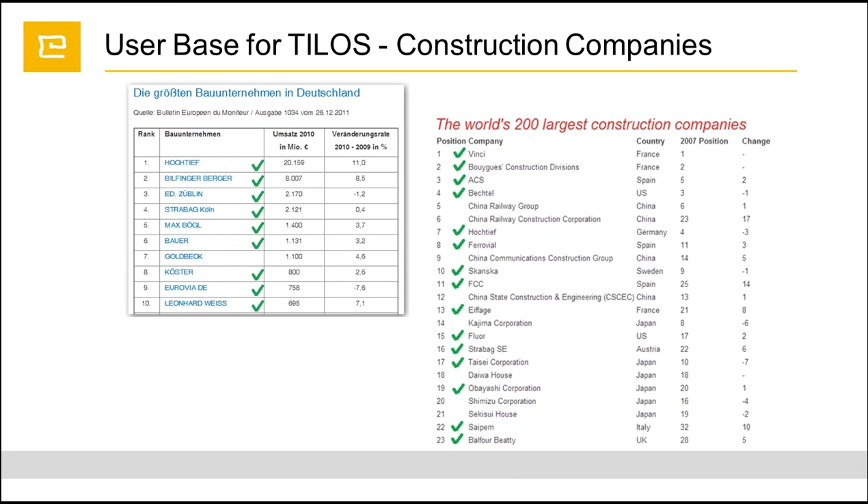TILOS also has big demand in the Middle East, in countries like Saudi Arabia, Qatar, United Arab Emirates, and Oman.

Okay, the linear project characteristics. As we know, linear project characteristics refer to projects like pipeline, railway, highway, tunneling, engineering, and transmission lines projects, and it has an axis which goes along with the work performed. We all know that linear projects have repetitive activities which go all along the length of the project.

Our goal is to optimize the productivity rate, reduce the project duration, visualize the project area, and minimize the overall cost.

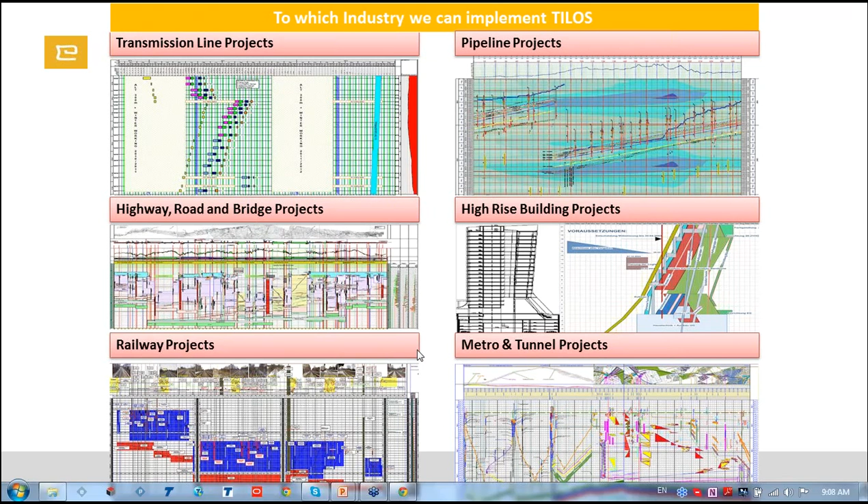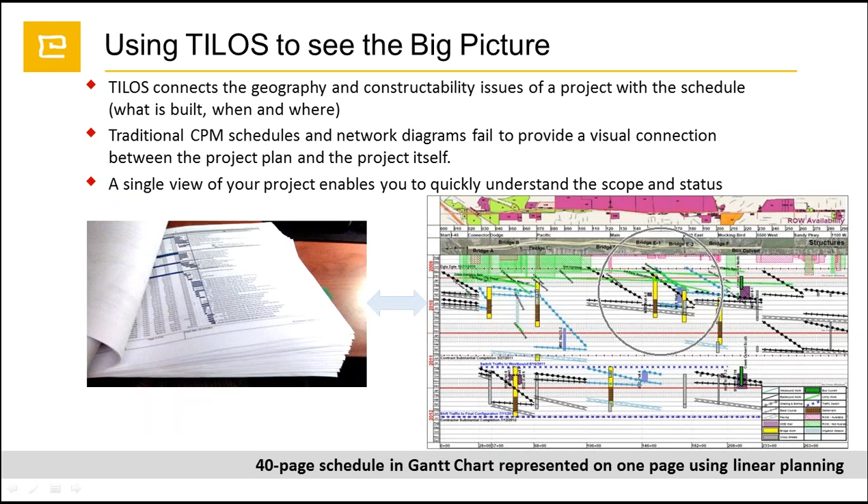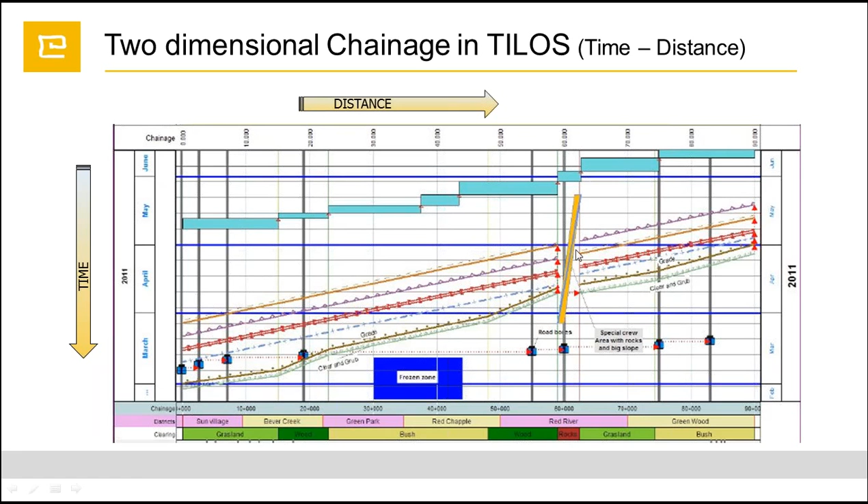So how does TILOS actually work? We have a main working area here. On the top, we have distance. This is a sample: let's say we have a 4-kilometer project that takes 3 months. All this is adjustable; you can put years, weeks, days, hours. Moreover, to support our work area, we can insert the graphical part of the project and also the elevation profile, where we have the road level, the cut area, and the fill area.

Let's say we have one activity starting from 2,600 meters and going right down to the beginning of the project, taking 3 weeks. Another crew starts from the other side of the bridge. You can see we have a bridge, and by the way, these are intersections - this is a road intersection, this is a rail intersection, and we have a culvert here. The second crew starts working on the topsoil activity from 2,600 or 2,800 until the end of the project, at 4,000.

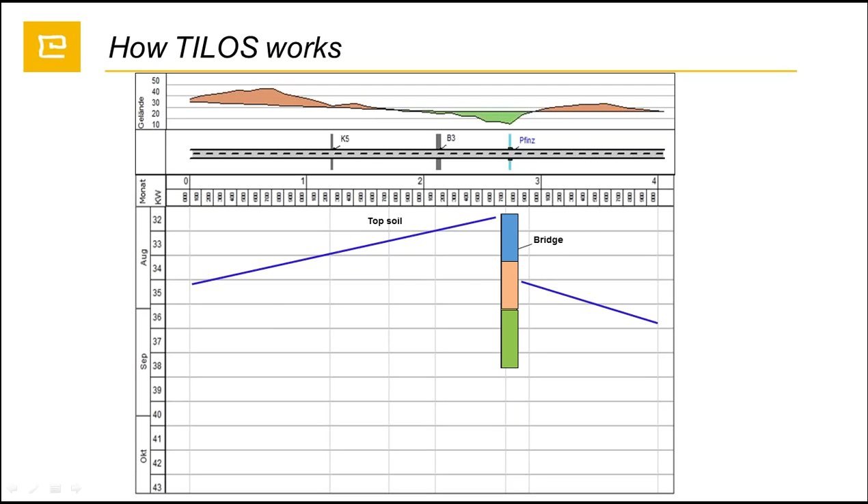TILOS can also manage not only linear activities but also structural works, such as a bridge, for instance. So the bridge can be set up as a summary task, and it can also be divided into parts, like foundation, abutment, and deck.

Also, we can see here that we have cut and fill activities. So the question is, why is this line, the cutting activity, different from the topsoil activity? Well, as you can probably recognize, this is one activity which has two breakdown points.

If we look up here, we can see that the quantity, the amount of soil, is much less, and it will take less time, around a few days, to cut this from 1,200 until 1,700. Our productivity rate is much higher as we have less amount of soil removal.

Another part is starting from the 1,200 until the 600 meters, and we can see that our quantity is much more, and we have to perform more work here, which takes longer than the previous part. The rest of the part will take around 1.5 weeks to complete.

Here we have, as a hammock task, inserted the filling activity. This is a triangle structure, and we can put it as a rectangle as well. This picture indicates that we cannot perform any other work until this filling activity is finished.

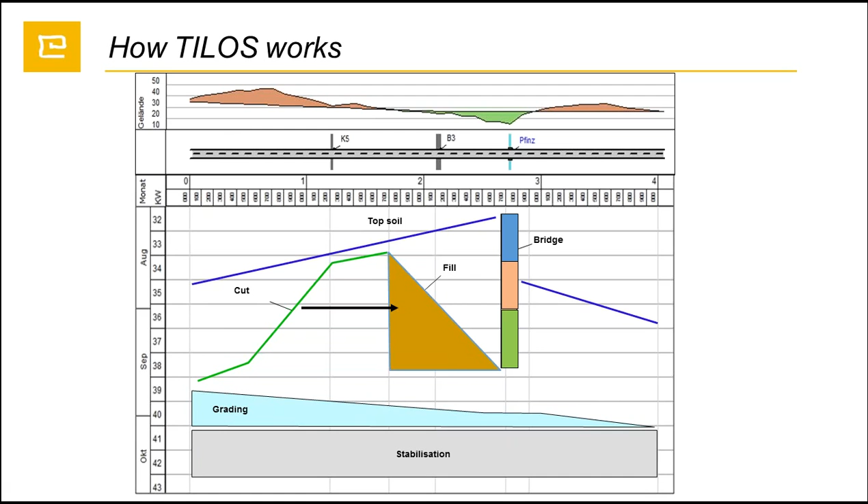Okay, TILOS has a strong clash detection advantage. This is a simple project, let's say, an illustration. In the middle, we have the area which, for instance during April at this kilometer place, has a restricted area. What I mean by restricted area is, for instance, there is an environmental restriction.

We cannot perform our work there until the time has passed. Or another part is that we have here the culvert. It might be given to another subcontractor, so we cannot perform our work here.

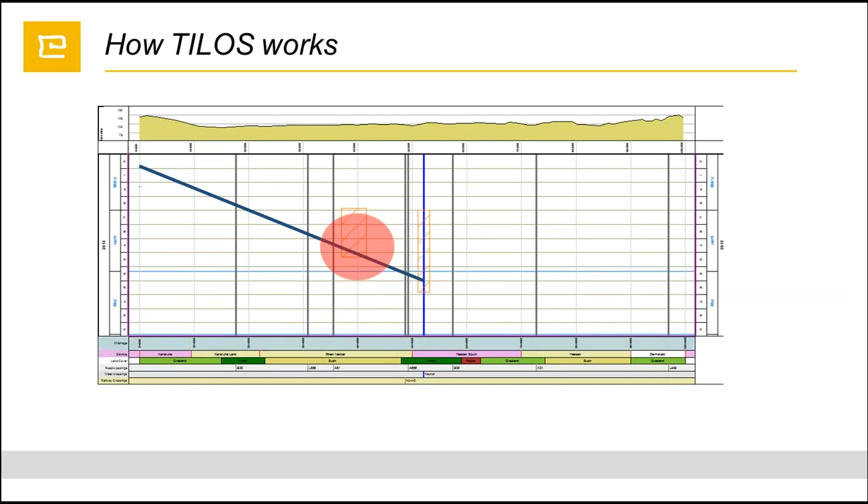So let's say we'll have an activity here, and we are able to see that our activity starts at the beginning of March, and is supposed to end here. However, we have here a clash. TILOS helps to analyze the clash detection, and to reduce it, there is also a possibility to avoid this clash just by moving the activity one week later.

So let's say the first activity, we postponed it for one week later, and another activity has a clash because it has a different work rate. So what we do in this case, we are able to move it as well and put distance lags between the activities.

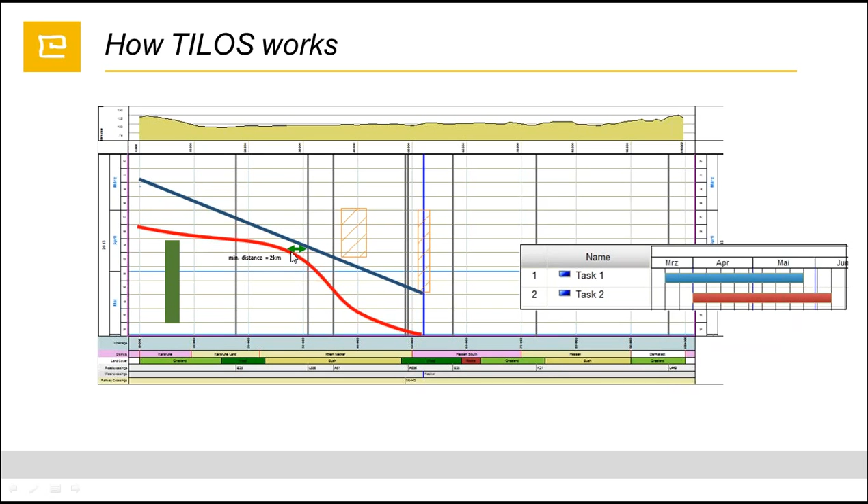For instance, we can put it on a daily basis, monthly basis, or length basis. We can say it's a 2 kilometers lag between each activity.

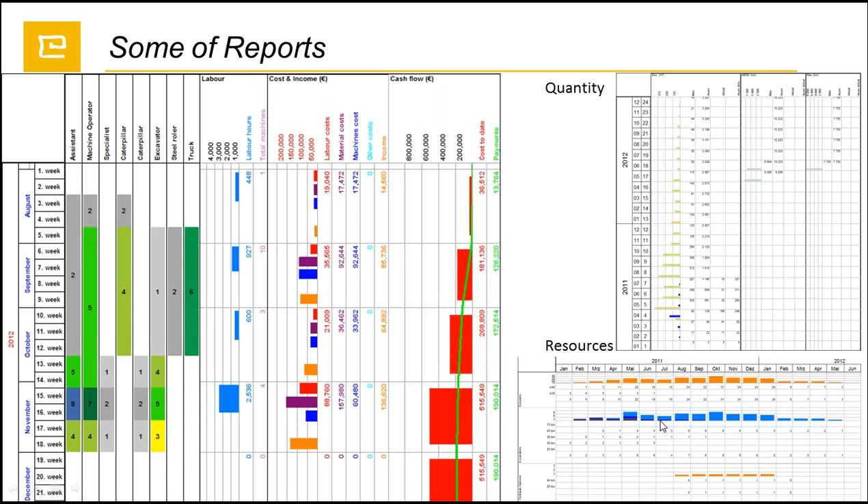TILOS has a big advantage with integrating with other systems. For instance, if you are a master user of Primavera, MS Project, or Asta Powerproject, you are able to transfer your data and project to TILOS from the clipboard or Excel, or from MS Project, P6, and Asta Powerproject using the XML format.

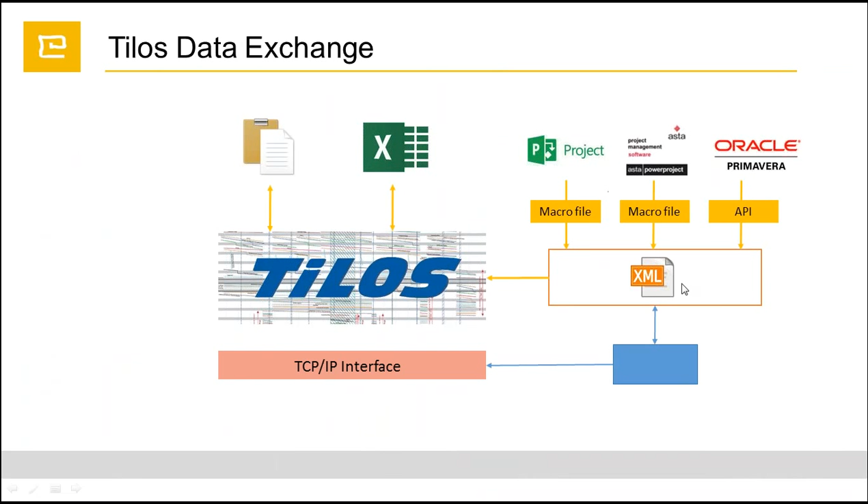So where do we actually use TILOS? We are able to use TILOS at any project stage, whether it is feasibility studies, overall plan, production plan, or special cases.

Also, it's used in pre-design, planning, procurement, execution, and claims, and it can be used by owners, engineering companies, subcontractors, contractors, or suppliers as well.

So summarizing my presentation, I'd like to say that we are able to use TILOS at any project stage level. Whether you have an ongoing project, we can implement it into TILOS, or if you have a tender stage, we are able to prepare your project as required, giving you multiple choices.

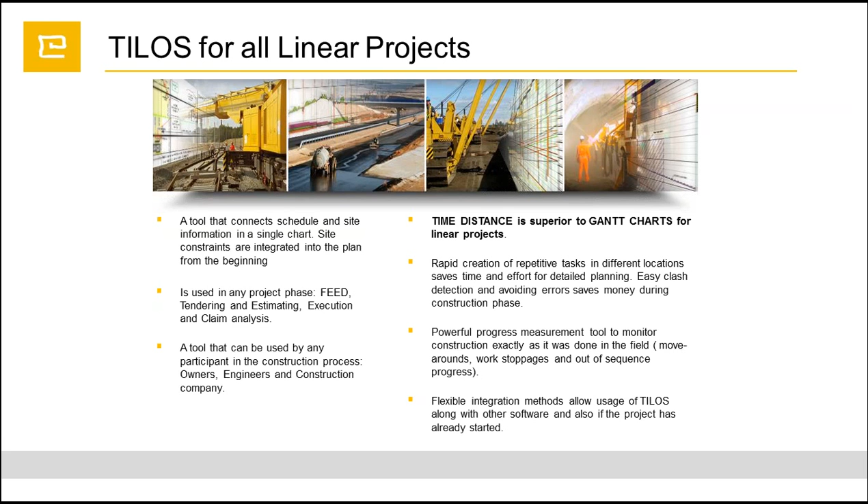Okay, now I'll go to the live demonstration of the project. Let me start TILOS first.

We create our project starting by clicking New. TILOS has a predefined template, but you can adjust the template or create your own that you will be using. If you are mostly doing road or highway construction projects, you can set up one TILOS template which will be used across different projects. In this case, we'll take the general template.

Setting up the project, we have the project name, the distance unit, whether it's meters or kilometer plus, then the start distance, end distance of the project, start date, and end date. Now we are able to set up the base and time unit, and set up the default calendar, or adjust any calendar as you would like. You can create your own calendar according to your country requirements, whether you have holidays or a winter period when you cannot perform work. You can set up your calendar and create your project accordingly.

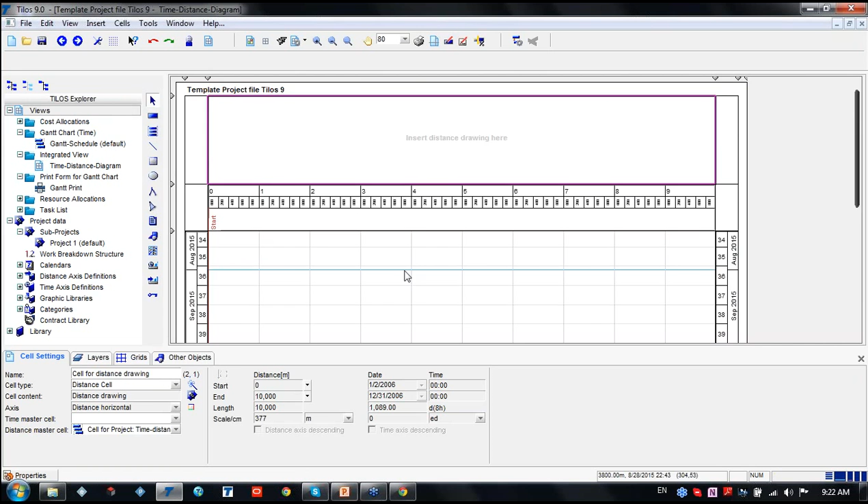As TILOS uses a cell system base, like in Excel, each cell has a different configuration setting, and our master cell is the main time-distance working area. By clicking here, we can see that all data entered into the main area affects the rest of the cells. So if you look at the lines, these are all connected.

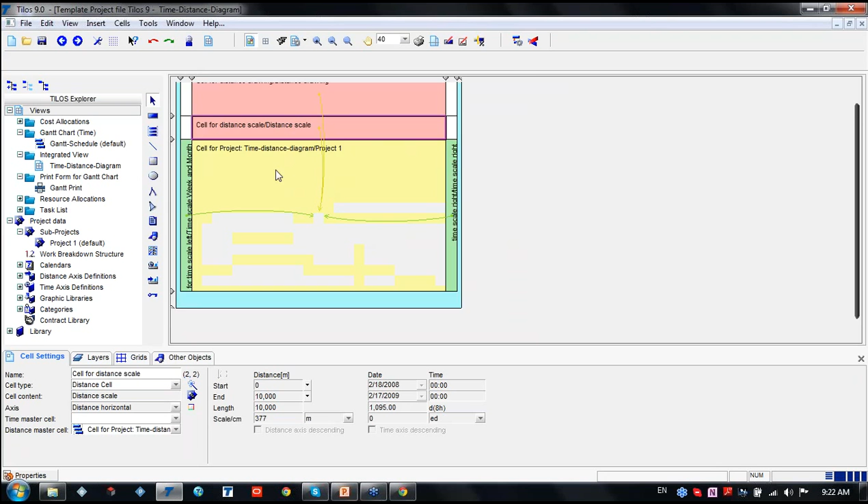Okay, so let's say we have a project starting from zero, and we have a project over 10 kilometers which will take around 5 months. Let's create this simple task.

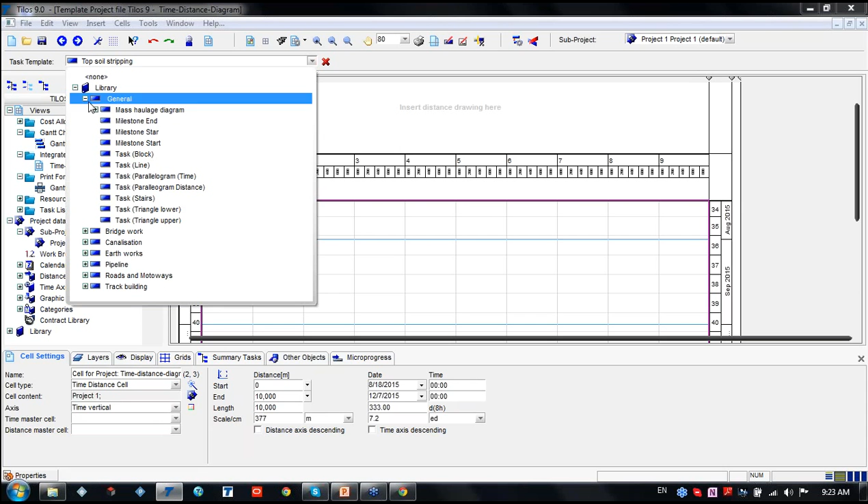For instance, we have a topsoil stripping task. This is the quick navigation where we have a library, and in the library we have task templates which are already predefined. As you can see, each task is predefined, and we are able to see it in our library section.

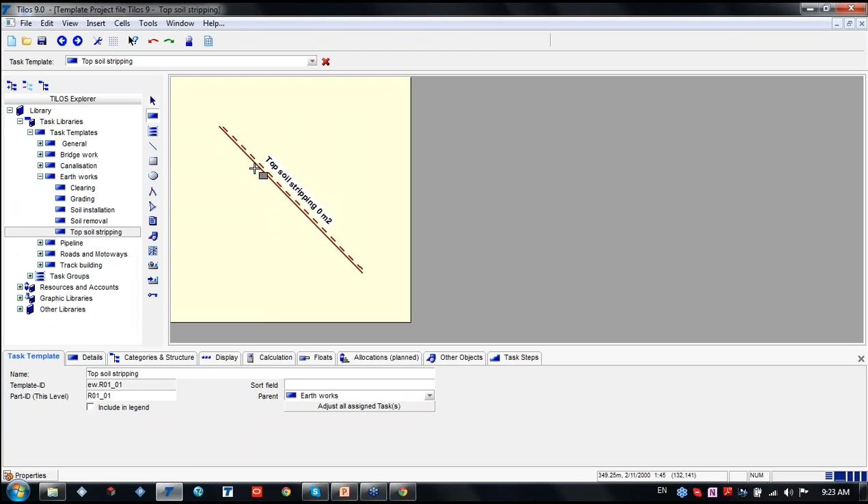Task libraries, task templates - let's go to earthworks and topsoil stripping. Each activity - well, one of our customers called it cosmetic works - and it's true, it is cosmetic work.

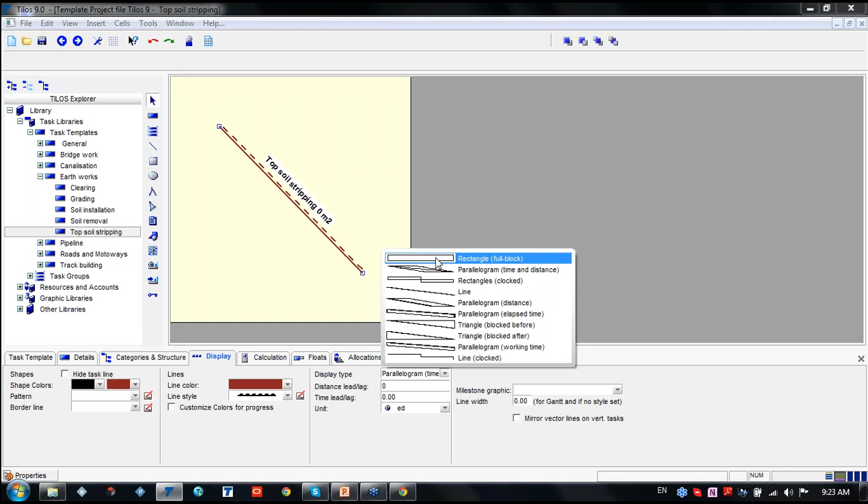We are able to set up the shape colors, then the pattern, as well as the display tab. It can be a rectangle or a parallelogram. Just a second, let me select, and you'll be able to see the rectangle and parallelogram options. Let's say we'll create - we're able to set it up.

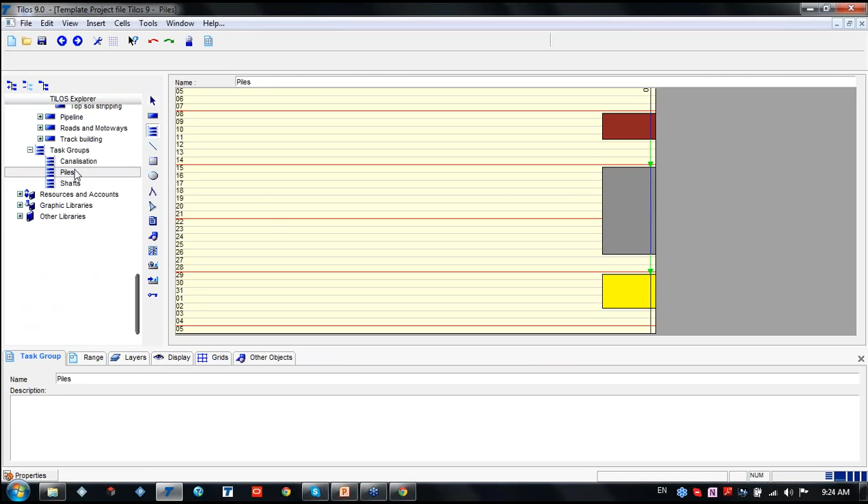Now this is just a task. If you go to the task template, here we have task groups, we have shafts, piles, canalisation - this is an already predefined task template which you can easily edit and add to.

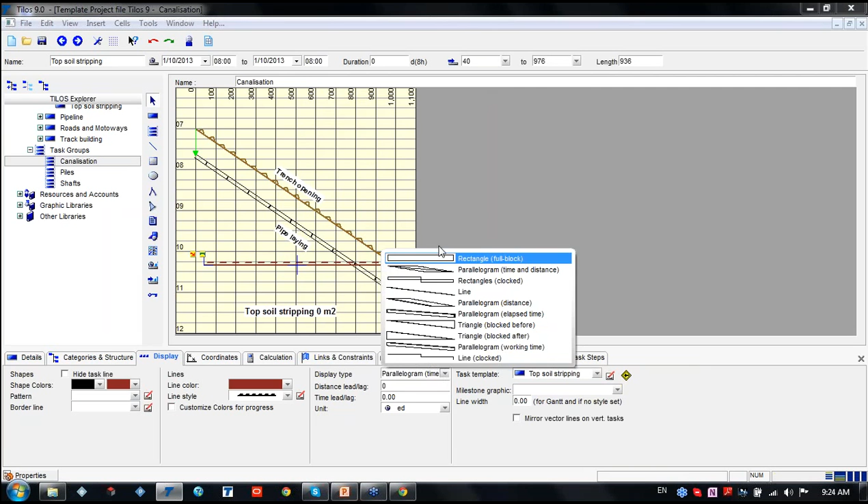Let's say I want to add another activity here, and it will not be topsoil stripping but trench opening. You can save it and you will have it. You will have the ability to easily enter this task.

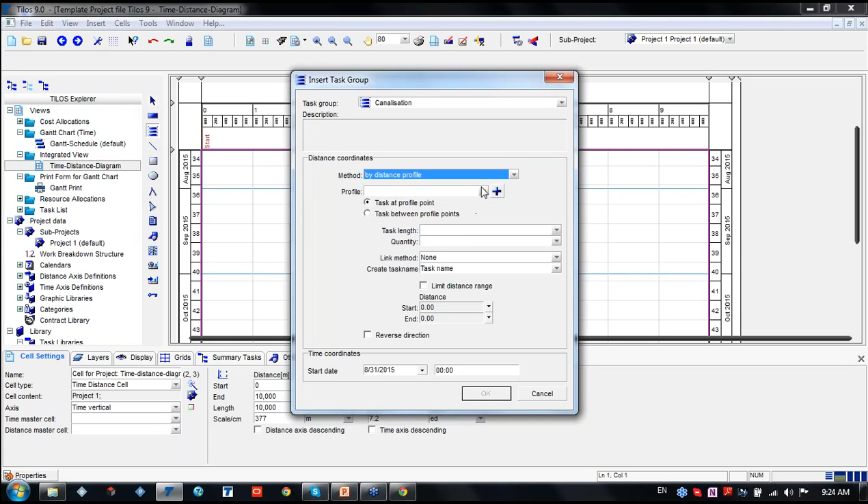By adding, let's say, the distance profile, important location...

Trench opening. Just a second, I will make it as a

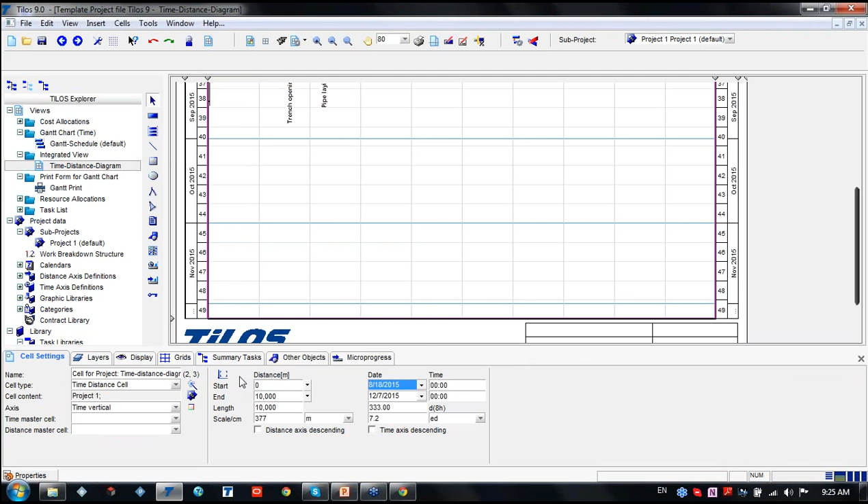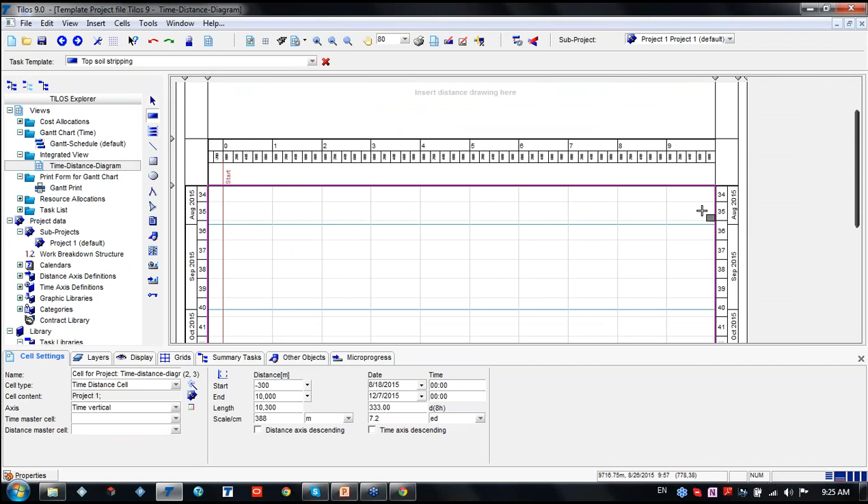Anyway, these are activities. Let me create one activity which will start from 0 and will finish at the end of the project.

So we are able to put the text annotation accordingly. We can put the name, the quantity, the unit time. Moreover, we are able to put the date, let's say the end date time. As you can see, we have here the end date already inserted.

The ability of TILOS gives us a big opportunity to manipulate with activity. As I mentioned before, we can change the display of the activity, the coordinates. The coordinates are really important. We are able to put the exact start date, end date, and length, also the duration. Also, we are able to change the direction of the task.

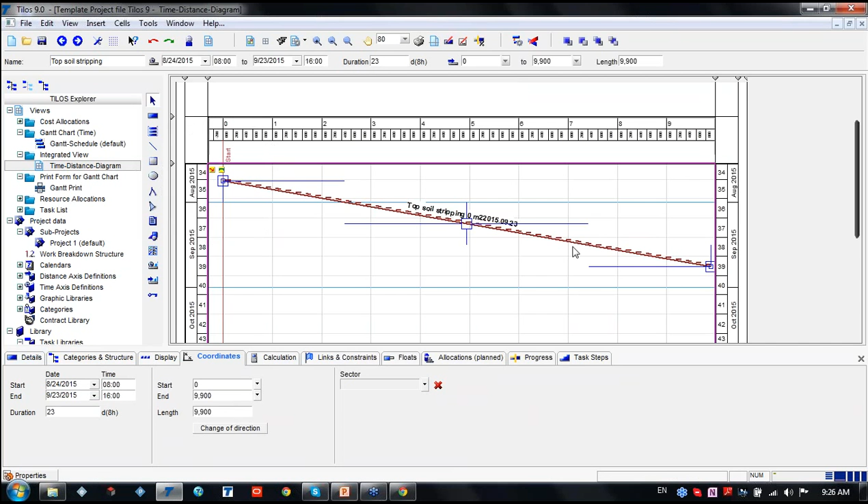Let's say our crew will start not from the beginning of the project, but will start from the end and go a different direction. So we're able to change it.

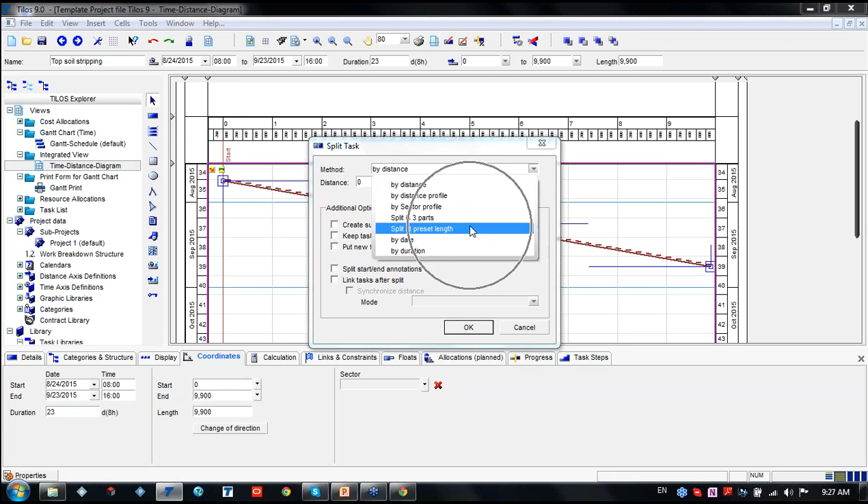Let's say we have two crews and we would like to split this task. We have split methods by the distance profile, by the sector profile, split into 3 parts, date or duration. This time we'll split by the distance, and let's say we'll have a split into 2 crews.

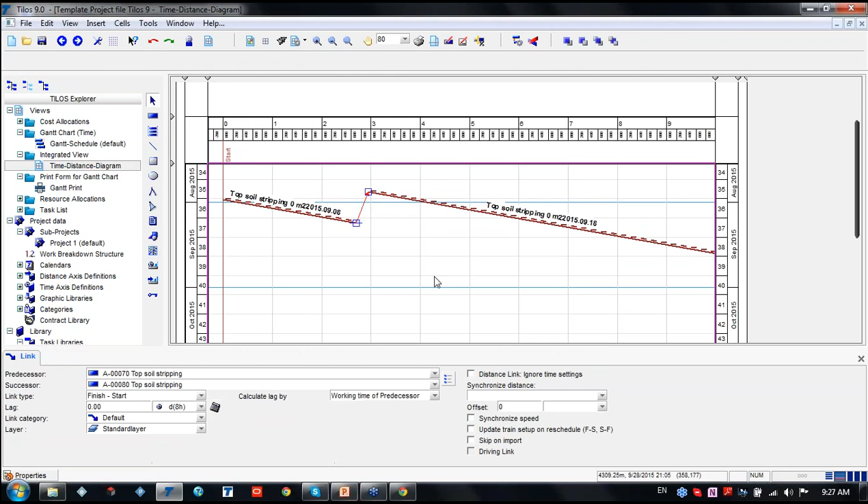As you can see right now, our activity is split. The linking option lets us say that once this activity is finished, we'll start another activity, and let me press reschedule.

Now we would like to indicate that there is a lag, let's say 4 days lag. We are able to see that after rescheduling, this activity, in the red part, another part of the activity will start after 4 days since this activity finishes.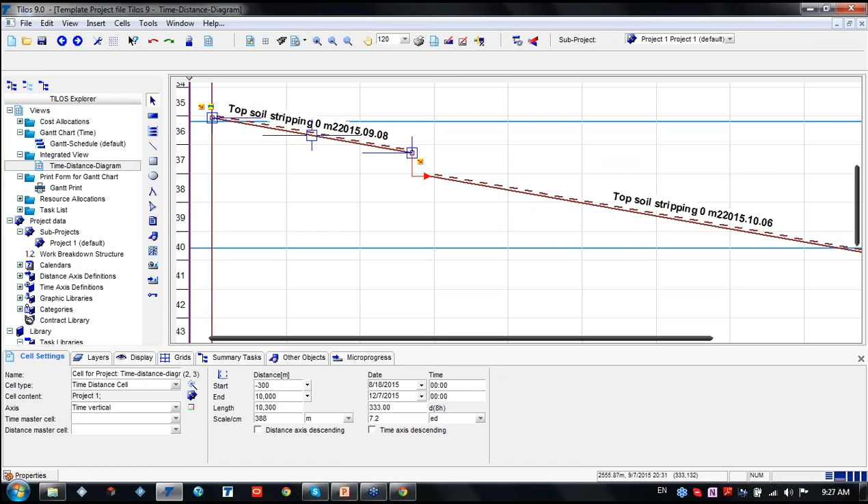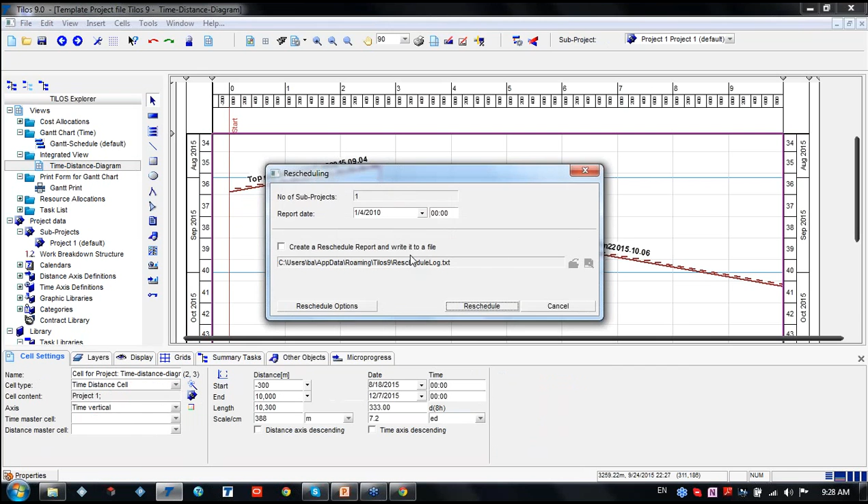Even after splitting the task, we are also able to change our direction to indicate the link as finish to start, start to start, or start to finish. We can calculate the meeting point, let's say the start to start, then reschedule. So right now this linking is as a start to start.

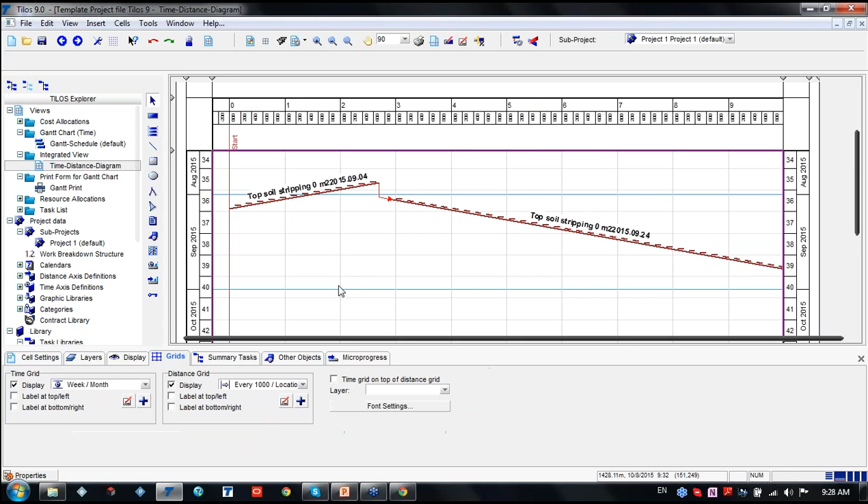We are also able to display on our main area the time grid, whether it's weeks, months, or year. We are able to put it in. So these cells are adjustable, as well as these ones.

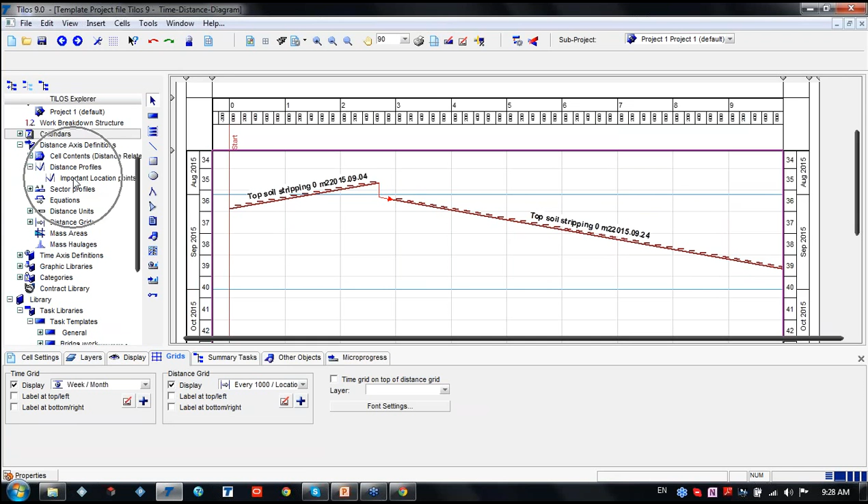We are also able to insert our location. Let's say when we go to the distance axis definition as a distance profile, we have where you can actually set up your distance profiles. When you go to the important location points, we have a start. Let's say we'll enter at 1200. We have an intersection.

On the 3000, we have a crossing. On 4000, we have a culvert. And let's say on 5000, we have a second intersection.

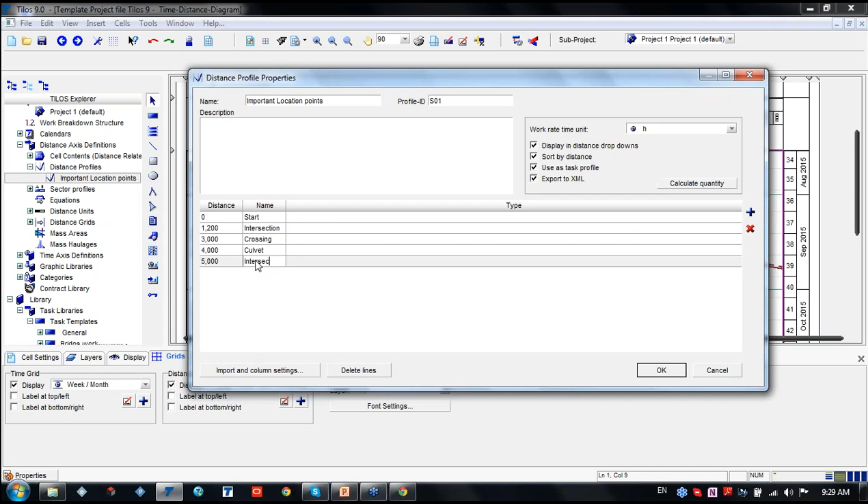Now we are able to see that these lines go all along the project, our working area. So even if you perform the work somewhere here, you are able to see which part of the intersections, or which section, you are working in.

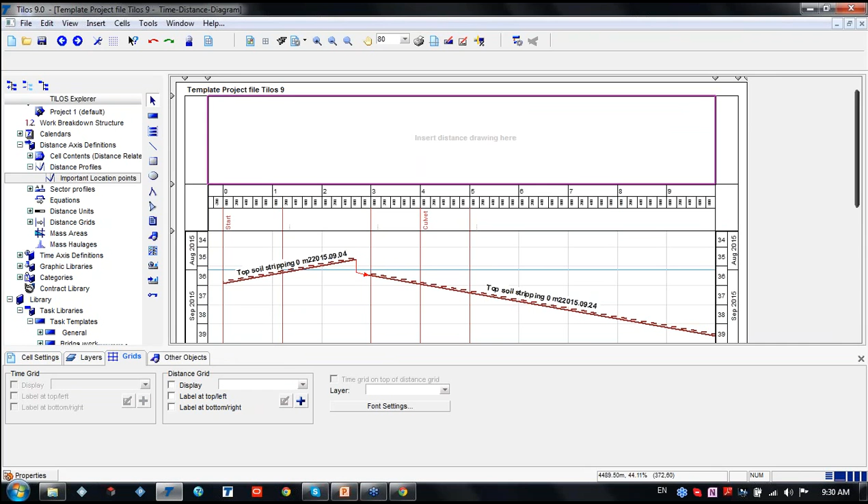As I mentioned before, TILOS has a quite good graphical integration opportunity, so we can insert the graphic object from the symbol library, from a file, or as an OLE object. If you are working in AutoCAD or a similar program, you are able to get the elevation profile data from it, if you have indicated all the graphics there.

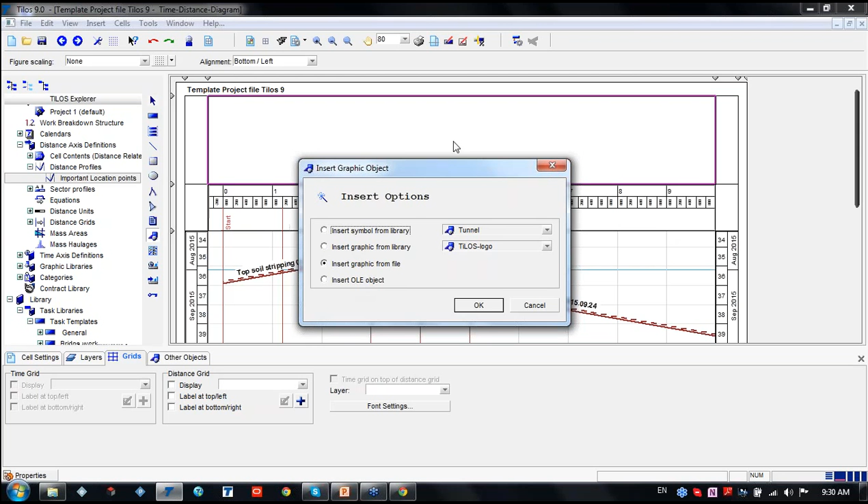Okay, just a second. I'll

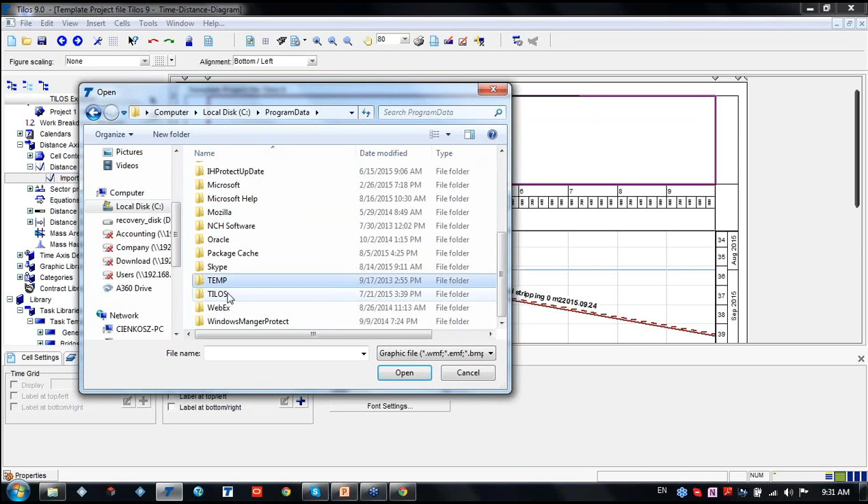Okay, here what we have is our graphical illustration.

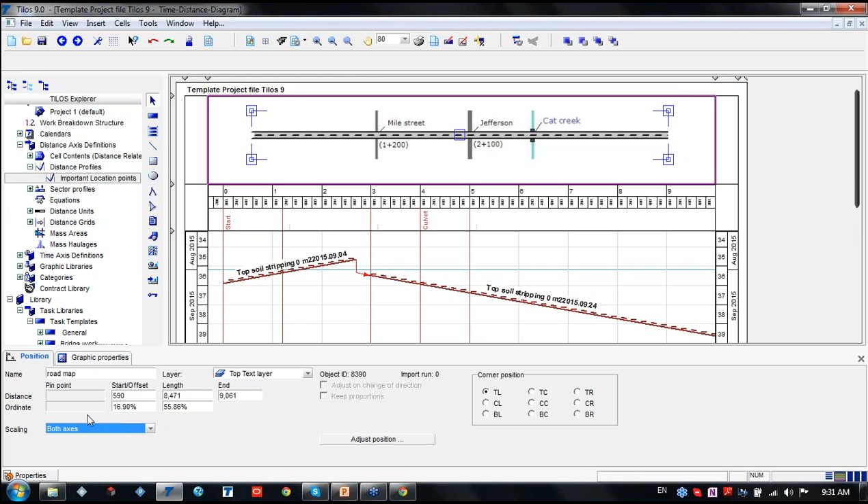And we would like to adjust this to each crossing regarding our crossing as well. So what we do in this case is click the scaling as both axis. We'll adjust the position accordingly, start distance from this 3000 until the 4000.

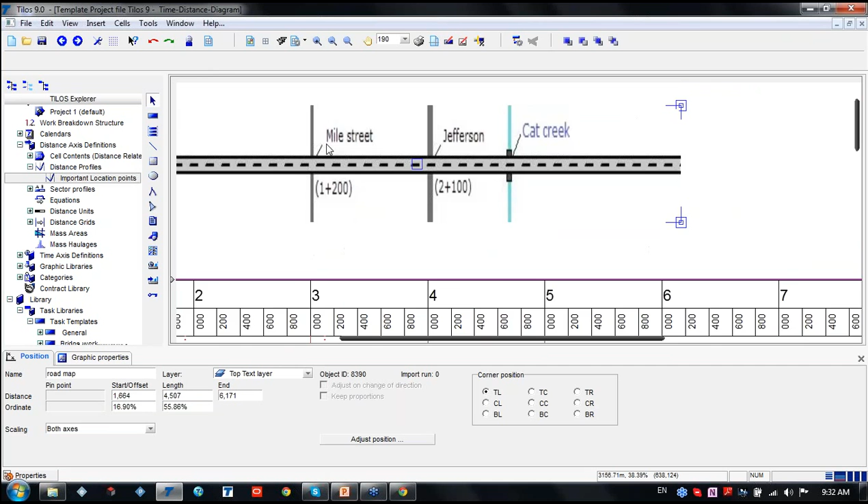Now we are able to see that this mile street is on a 3000, starting at 3000, and will end at Jefferson Street. However, I named it as a culvert, but let's say this is another crossing, and it will have a 4000.

Do you have any questions until now?

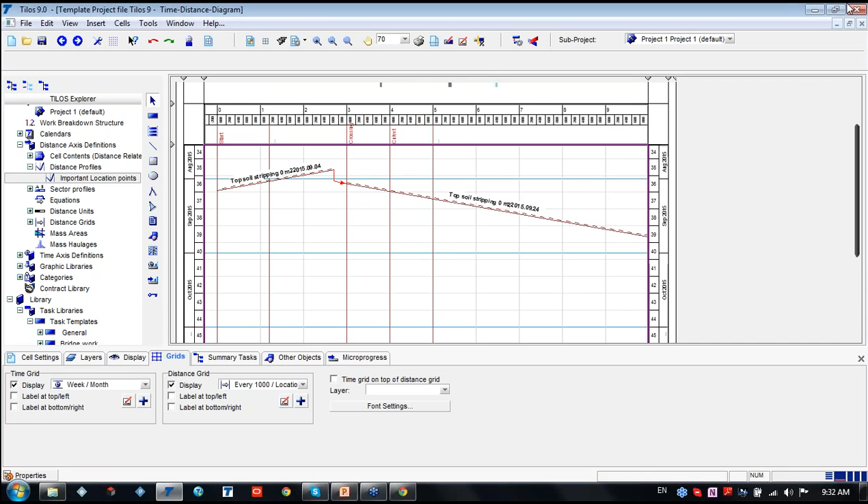Okay, no questions. So let me show you some sample projects done by TILOS.

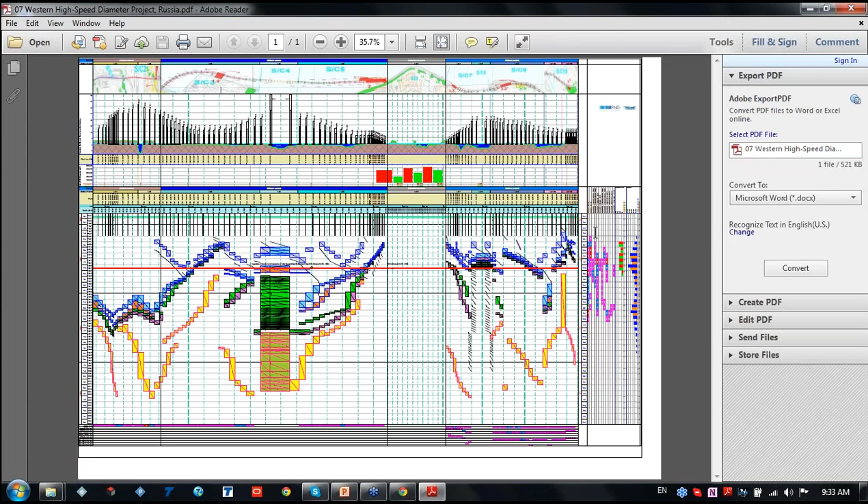This is the Western High-Speed Diameter project in Russia. A sample report. If we go here, we are able to see a graphical representation, sectors, station points, kilometrage, then the cut and fill histogram of the main working area, the design works until this moment, the station works.

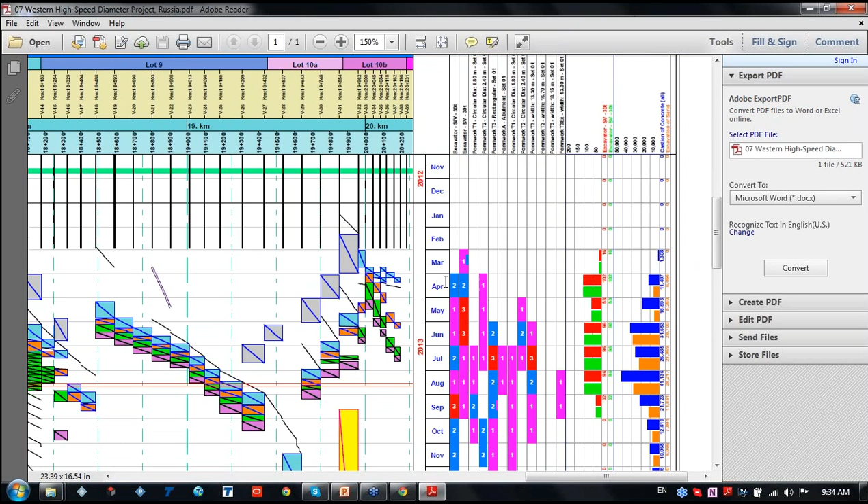So this is a time-based report. This is a distance-based one below. Resource distance-based.

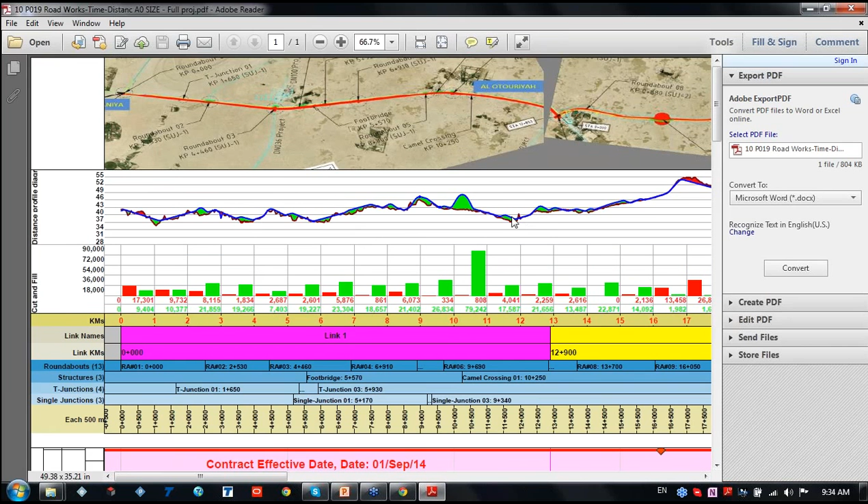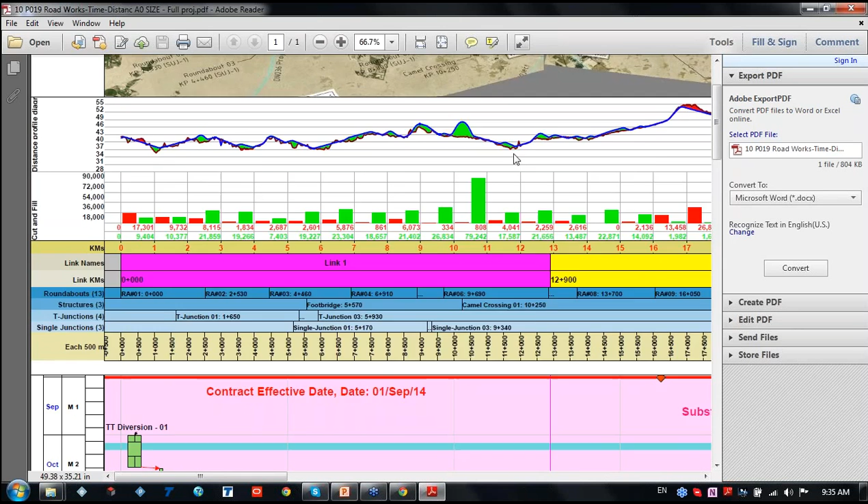Okay, another road project. I'm sorry, but I'm able to show only a few projects because due to the non-disclosure agreement with our customers, I'm not able to show most of our work. So what we have here is a cut and fill histogram. We're able to see a monthly basis, a section basis, or a daily basis histogram, distance profile diagram, the graphical way as well, the main working area. As you can see, this is a way too complicated project.

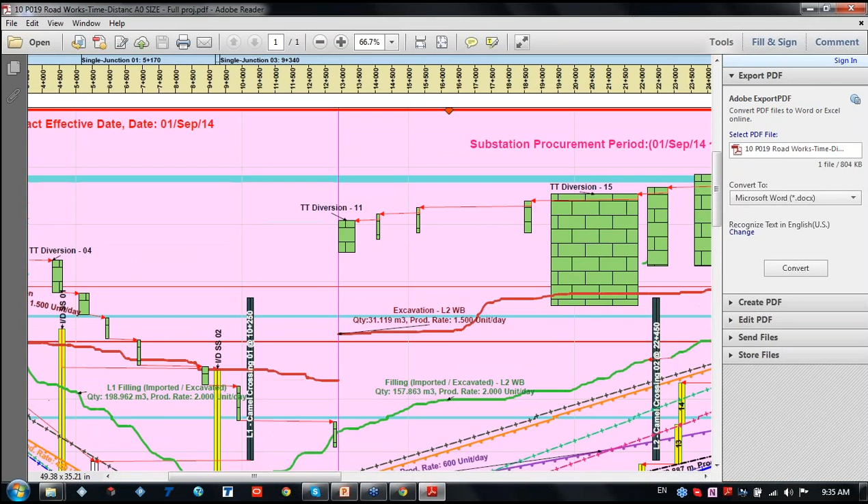It's divided into two parts. It's the same. This is a highway crossing project in Germany.

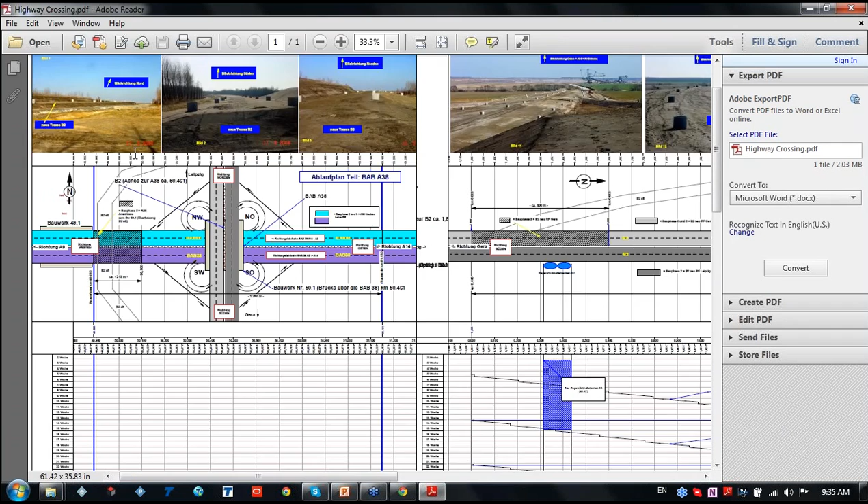All activities have a name. These people didn't want to put much more cosmetics on it. That's why it looks like this.

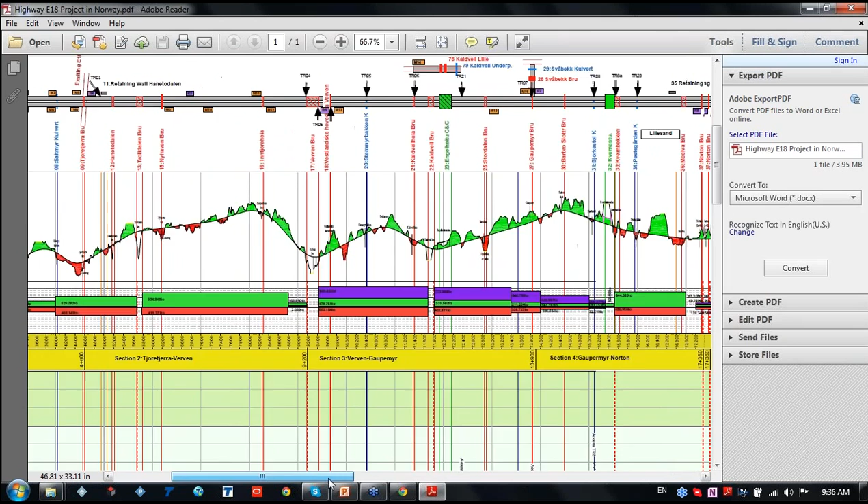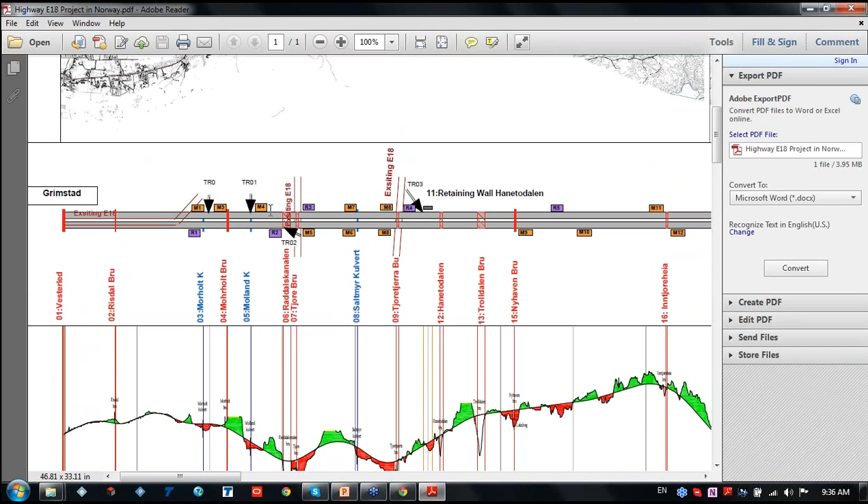Highway project in Norway. As you can see, we have defined the section, several section parts, cut, mass balance works, also the graphical illustration. These graphics are taken from the already predefined TILOS library.

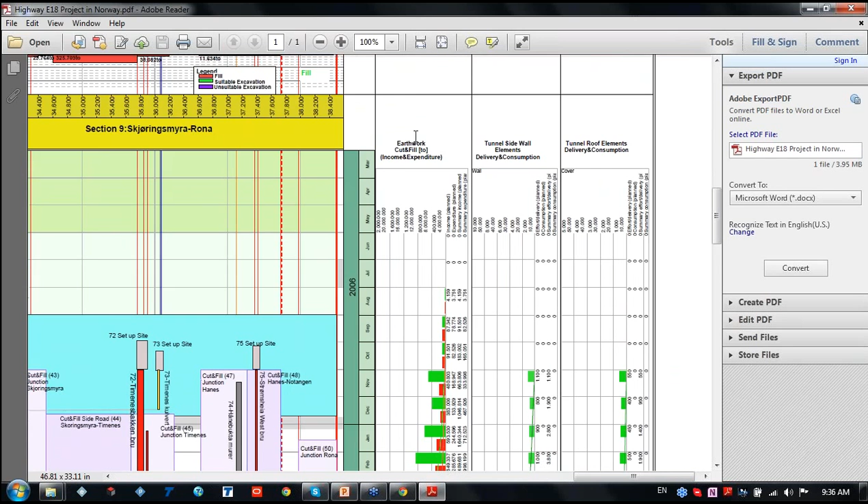Let's go to the reporting part. So here's a sample report at the earthworks, cut and fill reports, and the S-curve report as well. Then the tunnel side wall works, tunnel roof element works. These are the histograms shown based on the timely base.

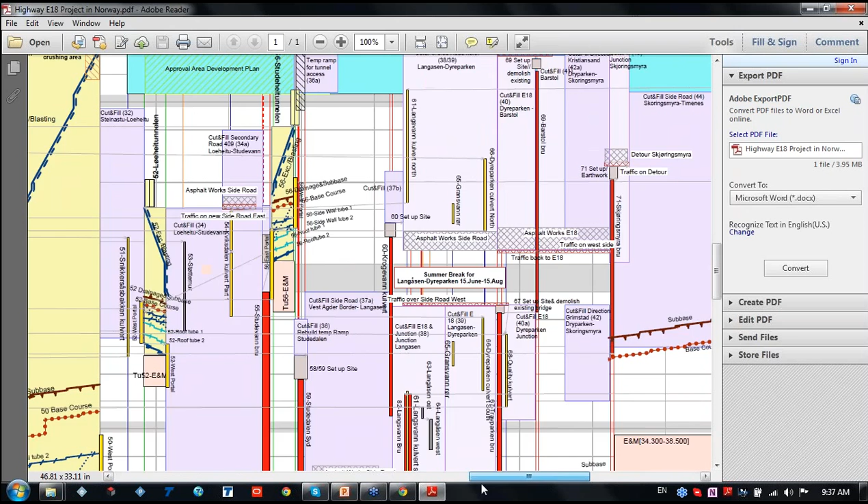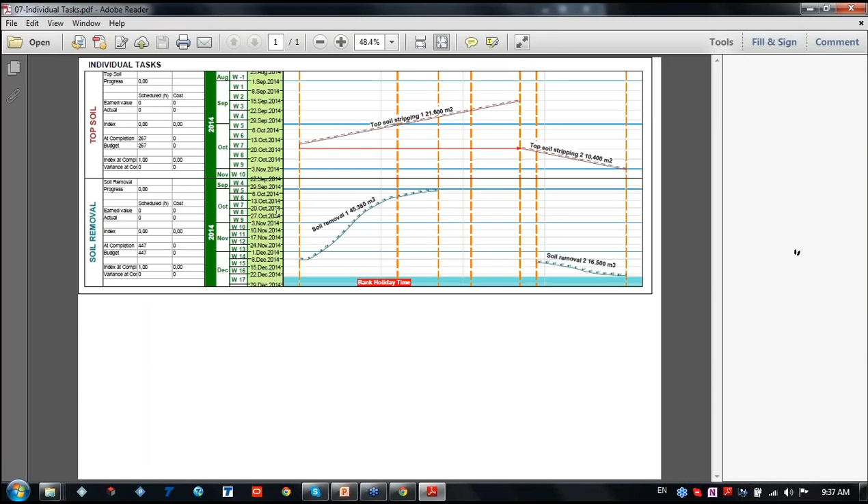Moreover, I had the question whether it's possible to show the report, or the view, not only on one page but for separate activities. Yes, it is possible. We have an individual task report. It is possible in TILOS using the category or the filters in order to put the progress, earned value, actual, for each activity.

So this is the activity. We have filtered each activity, and we are able to put the report on a separate page, as well as a performance dashboard, since TILOS has dashboard reporting. Let's say we have a planned progress, actual progress, planned progress for the topsoil activity, soil removal or pipe laying. It's indicated which sector, which kilometer, which activity, and it's also shown as a Gantt chart, a standard Gantt chart reporting regarding the distance.

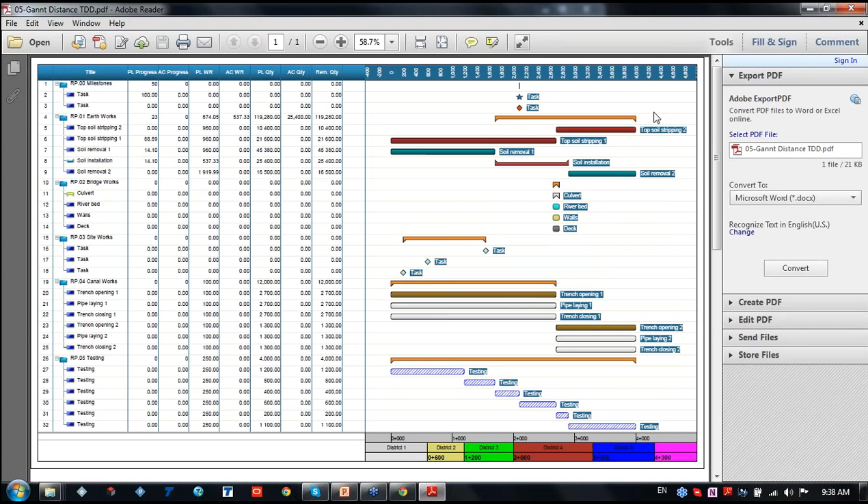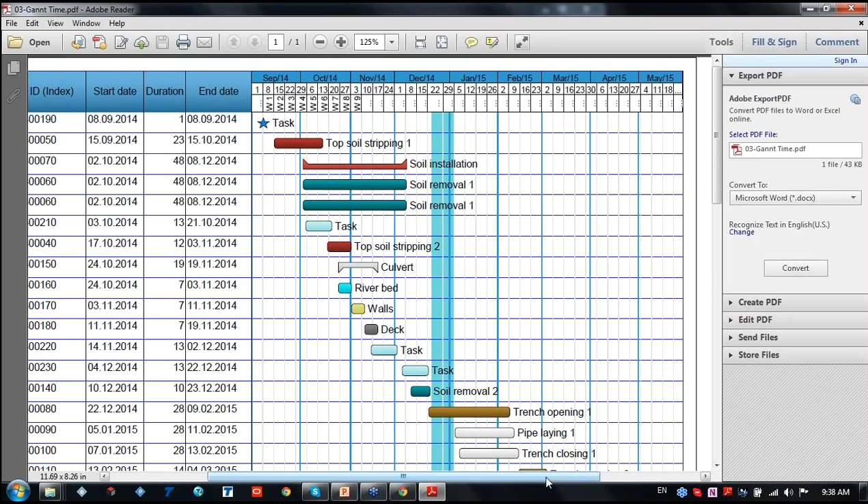Work type. This is time-based, you're able to see it on the time-based. If the previous file was on the distance-based, this is the time-based.

Okay, I have received a question from Jor. Jor, it depends on where you are located, because we have local representatives. He was asking regarding the online course or the live training and implementation part. Yes, we do provide it, it depends on your location. We'll contact you and give you the proper information where you can take the courses or trainings.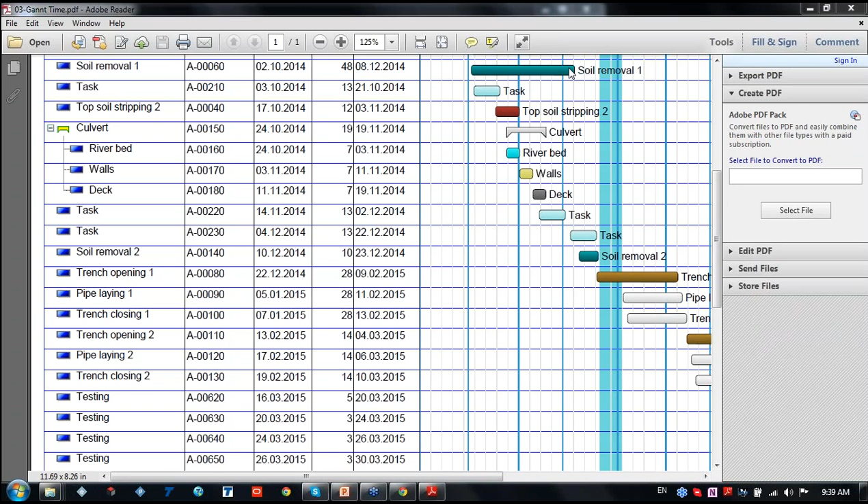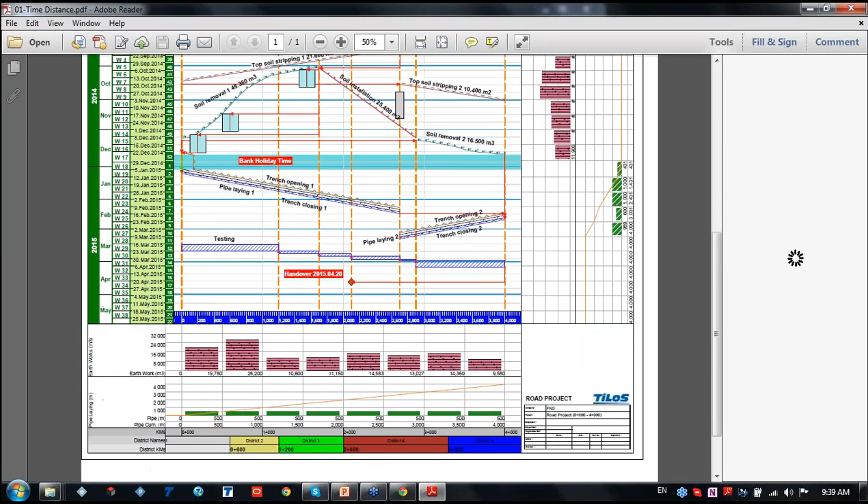Okay, and this is the general view of the project. Let's say I will open this project right now, and we'll be able to edit the data easily. So I have a project here.

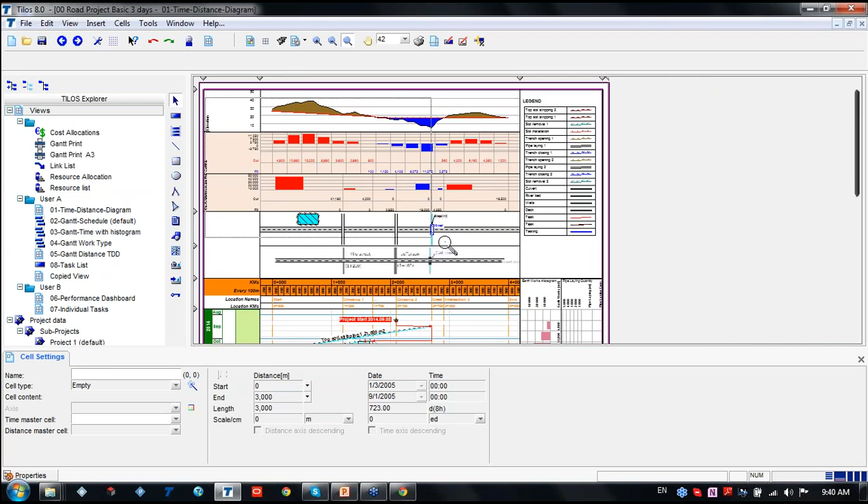What we did here, we have indicated the elevation profile. This is the planned roadway. This is the elevation profile, the cut and fill activities, cut and fill amount, where and how many cubic meters we have to cut and fill.

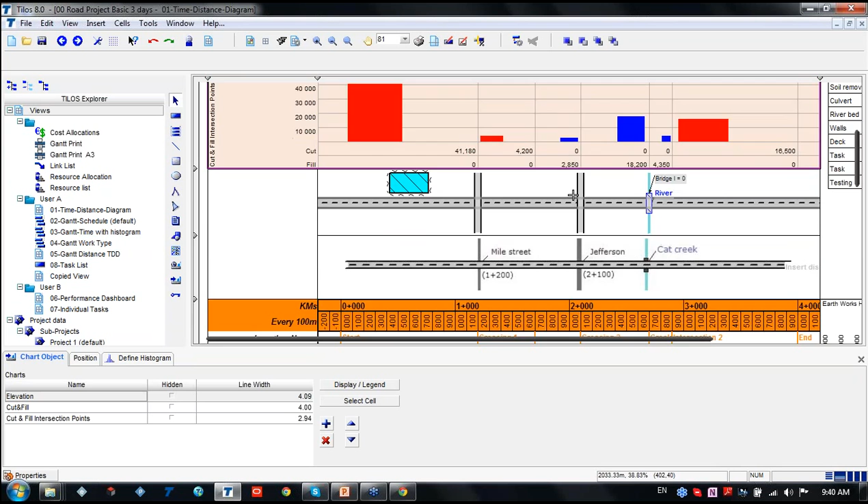This cut and fill histogram regarding the intersection points. Let's say we have an intersection here, a road crossing, rail crossing, and a bridge here, and we have indicated that between each intersection, what is our cut and fill amount. Graphical representation.

Project indicated the scale. Let's say we have a 4-kilometer project. We have indicated that we would like to see, every 100 meters, the location names, location kilometrage. Then on the left side, we are able to see the day, the week, months, and years. On the right side, the histogram of the earthworks and pipeline.

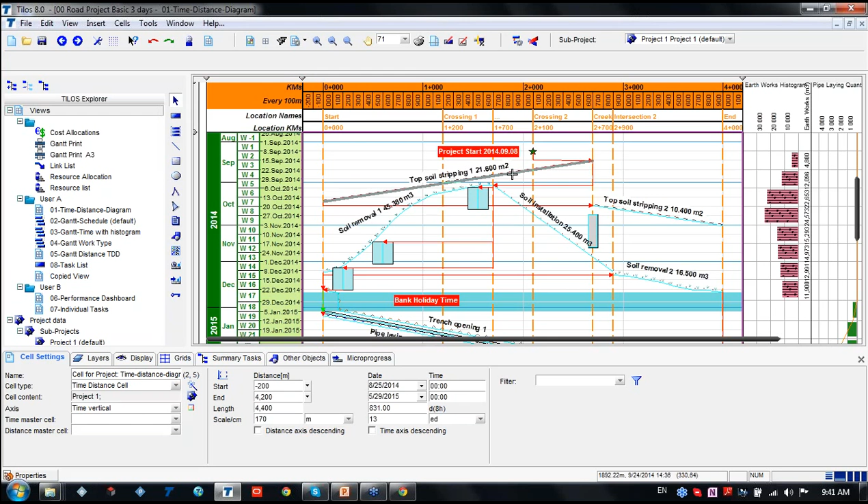This bank holiday is already predefined on our calendar. So we have a project start date, the topsoil activity, the topsoil removal, the second part, and all are the links.

We're also able to see the task list, not only in this way, but if you're used to the traditional way, we can see our task list from here, showing the name of the task, ID, WBS structure, which sub-project these tasks relate to, the calendar, task types—whether it's a hammock task or summary task, or milestone—start date, start time, end date, end time, duration, start distance, end distance, length, sector, layers, and quantity.

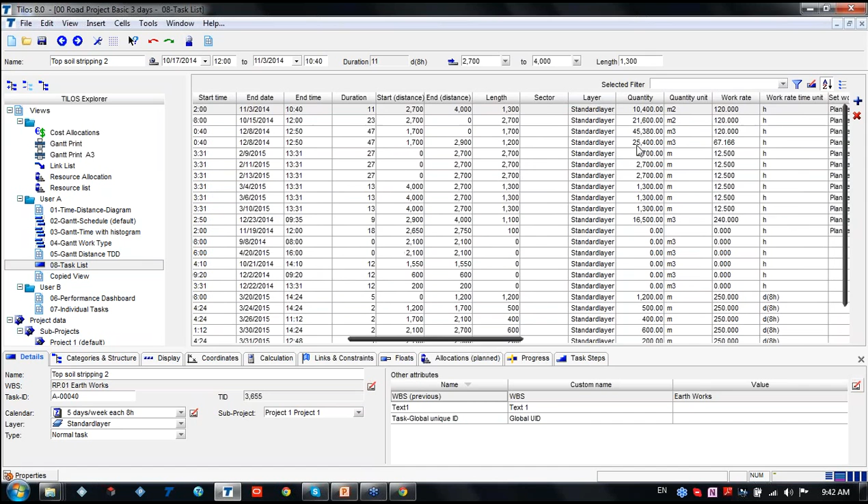So all information about the task is available here, or just by clicking the task we can see if it's a work type like clearing, the display, the coordinates, and the duration—which is automatically calculated. There's a quantity factor you can input, the planned work rate, the quantity, and the duration. We're also able to set the units.

Link and constraints: you can put the link, whether it is a predecessor or successor, or you can put the allocation of the resource.

In this part, we did not allocate any resource. The allocation of a resource is really easy—just click the part and you're able to allocate from the predefined template. You can edit this allocation, or create your own resource. Let's say we'll use the caterpillar.

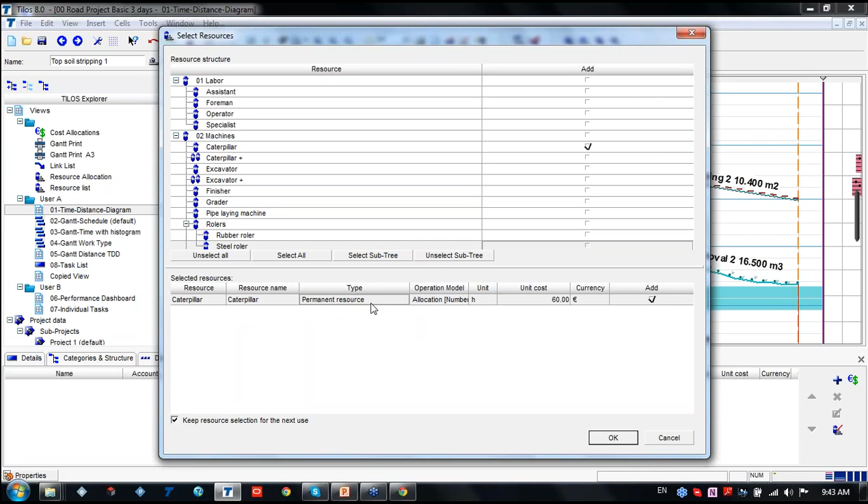When you create the resource, you have to put in the currency you're using, the unit cost, and the operation model—whether it's number-based, time-based, or project-based. You can also indicate if it's a permanent resource or a consumable resource. By adding it, we can see that the topsoil activity now has the caterpillar allocated to it, and this way you're able to input many other resources.

Okay, we have a question.

Joe asked if we can see the sample we did for vertical structures or buildings. If you'd like, I can show you how we did the high-rise building.

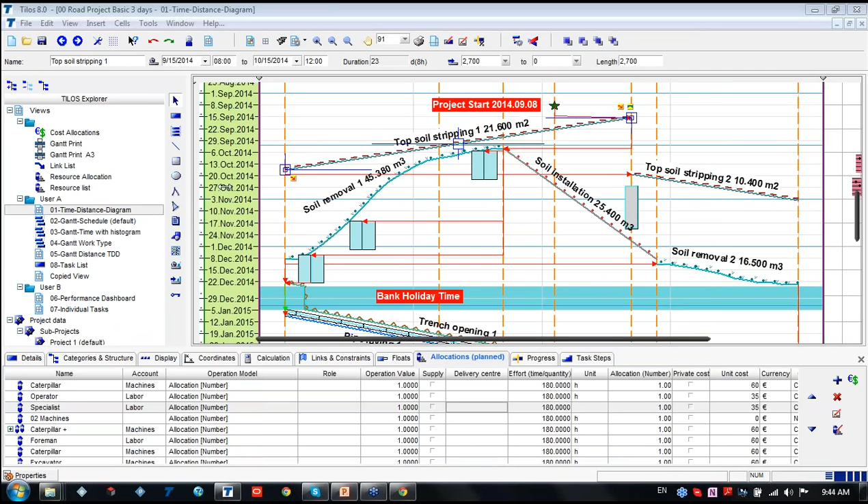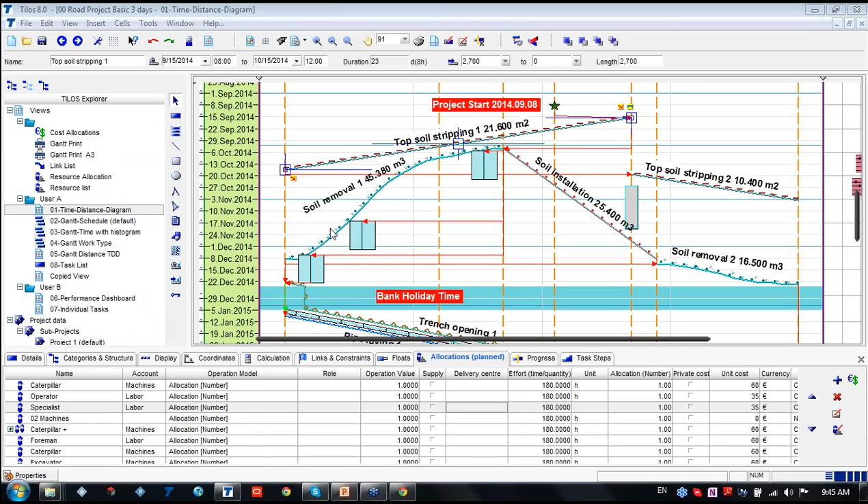Let's see if I'm able to find it right now. Okay, just a second.

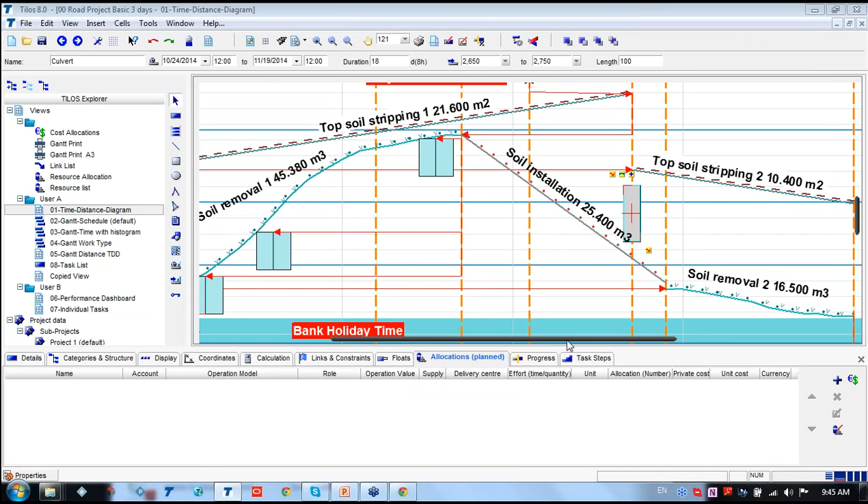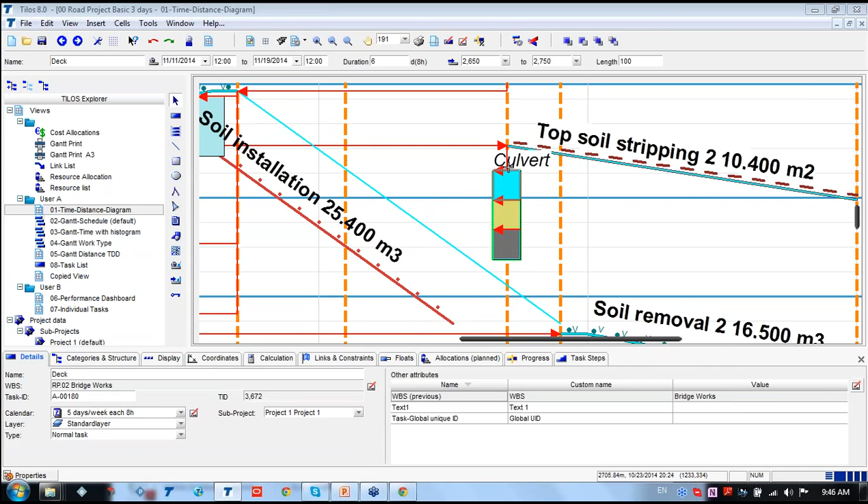Let me try to show here on the bridge part. Are we able to see the bridge part? So this is a summary task. When we click here, we can see that this summary task's WBS is divided into different parts—let me just remove this one. This is a culvert, and here we have the riverbed, then the walls, and the deck. So everything here is recorded as a summary task.

We have a question from Tony: does TILOS support a multiple-user environment, or is it standalone or server-based software? We have several types of TILOS—a USB stick version where TILOS is installed and licensed on your USB, a floating license, and a standalone license. With a floating license, the network license is stored on the server, and any user can connect to the server to get the license and work with TILOS.

Tanya asked what kind of IT infrastructure is required for installing TILOS. TILOS has minimal configuration criteria, so it doesn't require a strong machine like, for instance, Revit or AutoCAD requires. It's really easy—an easy-go application.